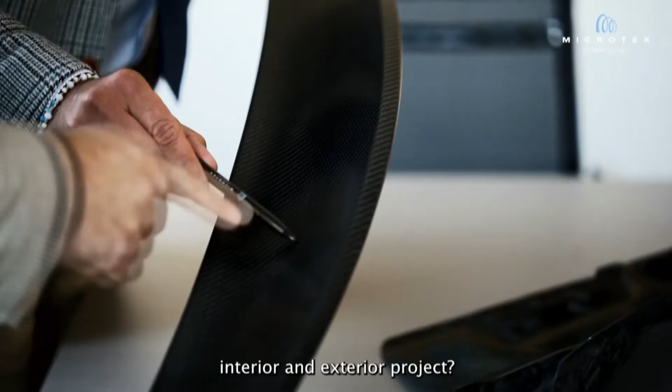And now a small presentation of our company. At Microtex Composites, we believe in our customer's ideas. I founded this company based on this belief together with my co-founders Gianfranco, Silvio and Federico. Do you have a customized interior and exterior project? A project in aesthetic structural composite material? Trust us. Our over 50-year experience in textile industries makes us experts in composite material, from dry fabric to prepreg.

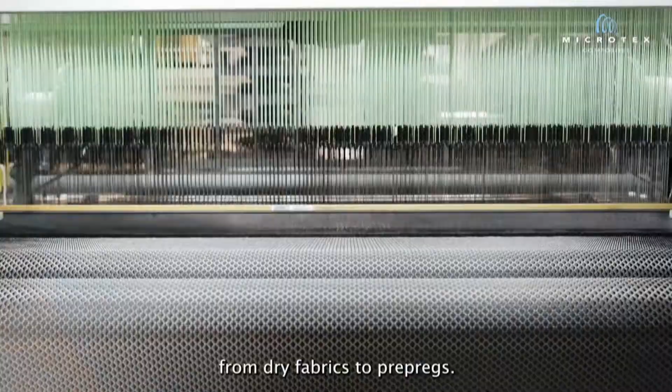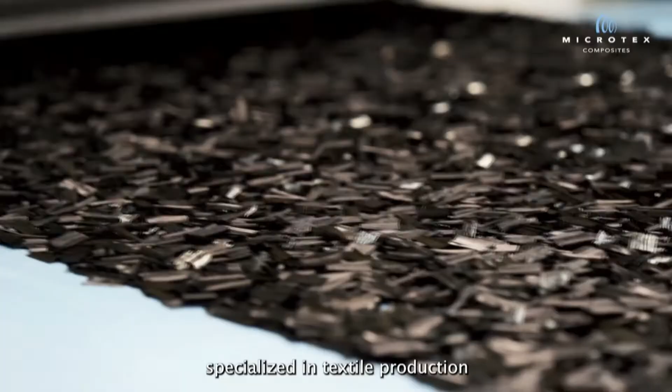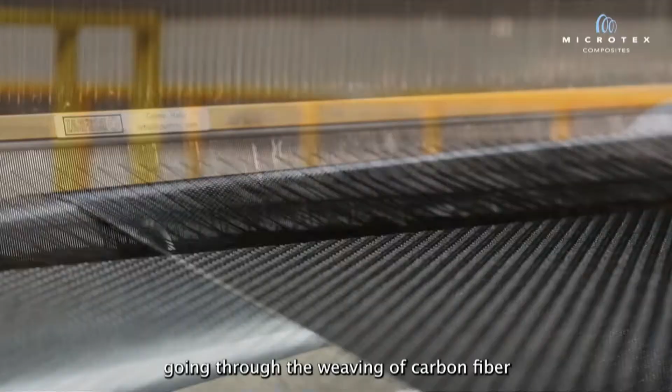Let's have a look at our history. Microtex Composites belongs to the historical Becagli group, specialized in textile production since the end of the Second World War. Nowadays we manage a fully integrated production chain, going through the weaving of carbon fiber, the development of our own resin systems, and the preparation of prepreg.

At this moment, we are looking around to expand our market overseas, especially in the US. Stay tuned.

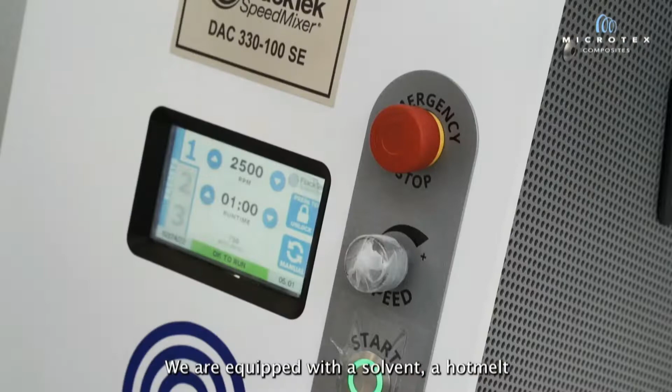This is the new operational headquarters located in Pistoia, close to the other headquarters in Prato. It is 8,000 square meters. We are equipped with a solvent, a hot melt, and a UD impregnation line, and a new SMC line, with more to come. The new headquarters features a new state-of-the-art refrigerator area, one of the largest in the market, capable of storing 180,000 square meters of prepreg.

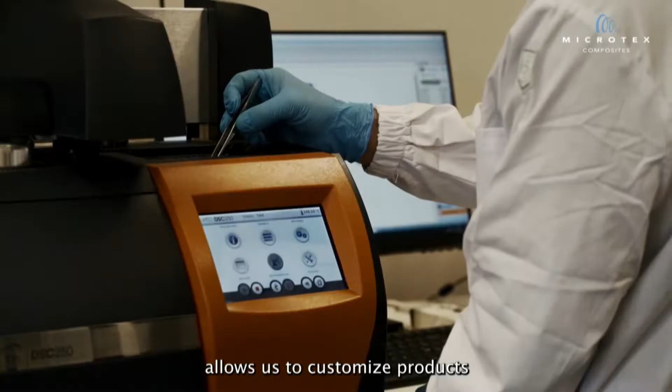We turn clients' vision into reality, beyond expectation. Our ongoing research for new inspiration allows us to customize products and match customer needs. Microtex Composites: your vision, our mission.

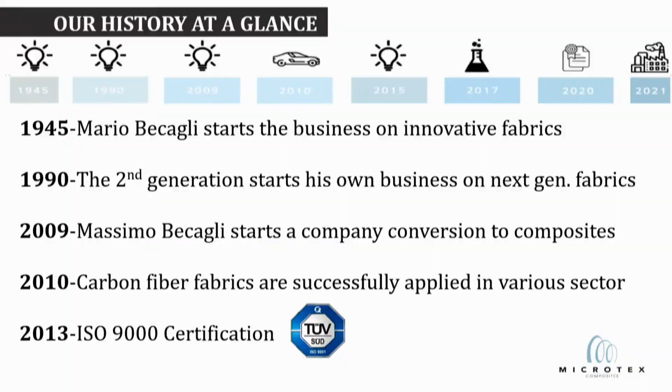So just to summarize a little bit the story behind the company: at the end of the Second World War, Mario Becagli was the first generation of the family, which started the business on innovative fabrics. And in 1990, the second generation started their own business, mainly on next generation fabrics and processes as well.

In 2009, Massimo Becagli started a company conversion into composites, so part of the company was converted into the composite market. In 2010, the carbon fabrics were successfully applied in different composite sectors. In 2013, we achieved the first ISO 9000 certification.

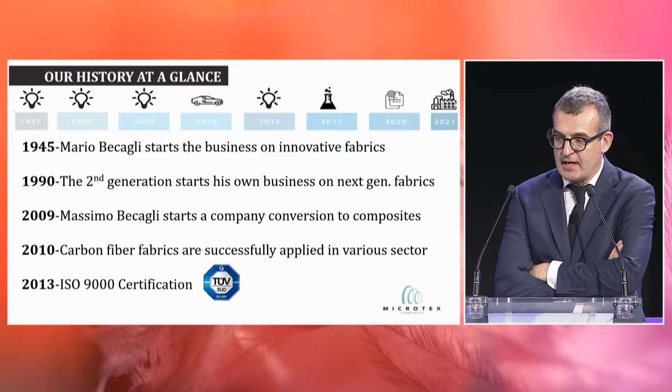In 2015, there was a spin-off of the mother company, so the birth of Microtex Composites, which was a spin-off of Microtex Cotton Club, which was oriented to fabrics for garments. In 2017, there was the implementation of an internal R&D lab, an improvement, and the building of a commercial network in the European, Middle East, and African area.

In 2020, the company reached the IATF 16949 certification, which is oriented more towards the automotive market, and the production capacity reached more than 2 million square meters per year. In 2021, there was the inauguration of the new 8,000 square meter plant in Pistoia, close to the original plant based in Prato. And in 2022, we reached an agreement with the Kordsa Group.

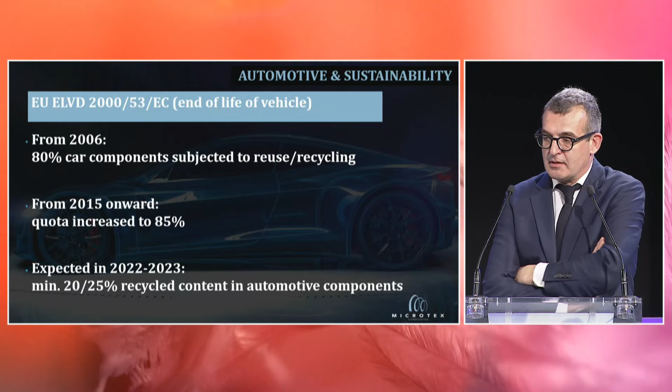This recycled content definition is still in discussion. There's some idea to consider recycled content as industrial scrap, production scrap, or end-of-life vehicle scrap. The use of composite in the automotive market is relatively young, so there isn't a big amount of recycled composite from end-of-life vehicles yet. This topic will probably become clearer in years to come.

At the same time, there's a vision in the same direction from the European Commission related to industry and sustainability, concerning packaging and packaging waste. This is an important part, because packaging is still not such a small part of our production.

For the moment, the minimum recycled target for packaging waste is fixed at 22.5%. There's a plastic tax for the European market on non-recycled material of 0.8 euro per kilo, which pushes producers and the supply chain toward recycled material.

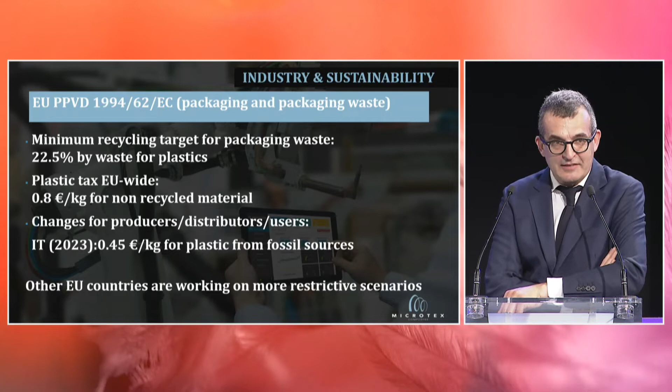In Italy, next year there will be an additional tax still to come, 0.45 euro per kilo for plastic from fossil sources. Other European countries are working on more restrictive scenarios, and we expect the situation to become much more restricted in the future.

As I said, the company approaches sustainability in all areas. Since the creation of the company, the original production site was fitted with a 1 megawatt photovoltaic power plant, helping reduce the carbon footprint of our internal processes. There's also a thermal oxidation plant for solvent oxidation, to recover energy from the oxidation of solvent and to reduce emissions below the local legislation level.

At the same time, on the new Pistoia site, we actually have a 0.2 megawatt photovoltaic power plant, and we are planning to increase the capacity in the future.

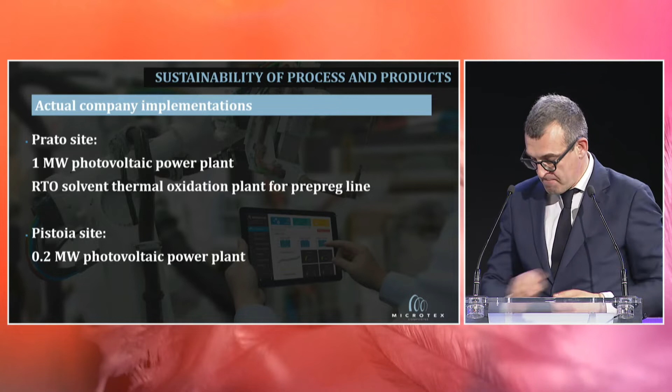So what is our philosophy here—introducing systems to reduce the carbon footprint during our processes is something all our customers are asking about. It's about understanding the impact of carbon footprint in our processes and in our products. This year we decided to have a dedicated department for this activity, starting with the aim to provide information to our end users in terms of CO2 footprint.

Our approach will be progressive. We start with a gate-to-gate approach, focusing mainly on the carbon footprint and energy dedicated to our internal processes—once material comes into the company for transformation, until it is transformed and ready to be delivered to the customer.

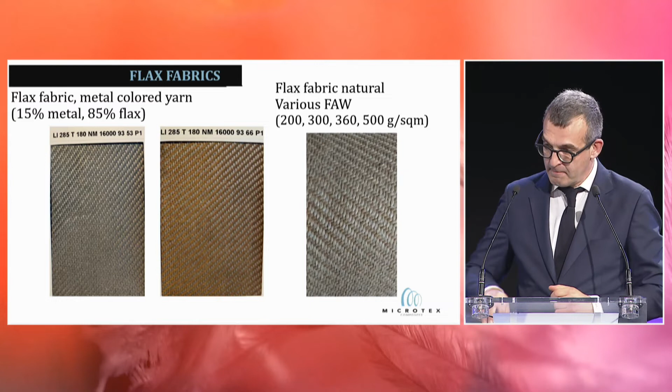We also produce a portfolio of recycled PET, which is combined with metallic yarn as well. These combinations are mostly used for car interiors.

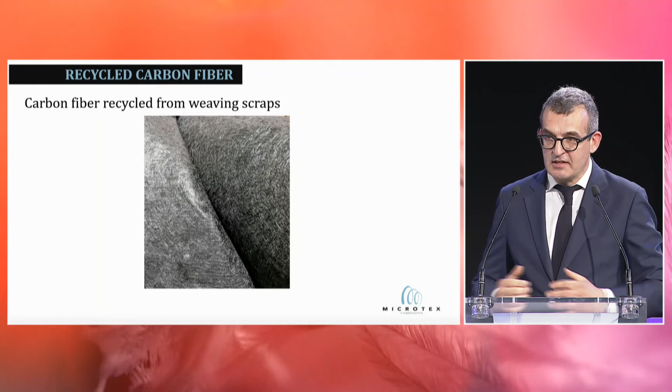Another important activity we developed over the years is carbon fiber recycling from weaving scrap. So basically we are talking about non-woven material, and this non-woven comes mainly from our industrial post-process material.

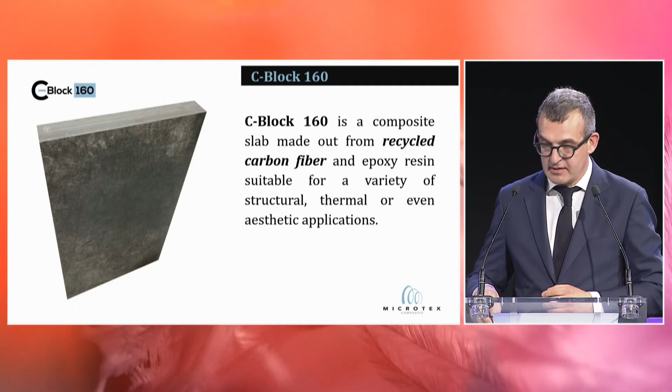Based on this experience, we started to produce some tooling blocks called C-Block 160. This is a block made from recycled carbon fiber and epoxy, and it can be used for different structural, thermal, or aesthetic applications. We produce this material from post-industrial scrap material.

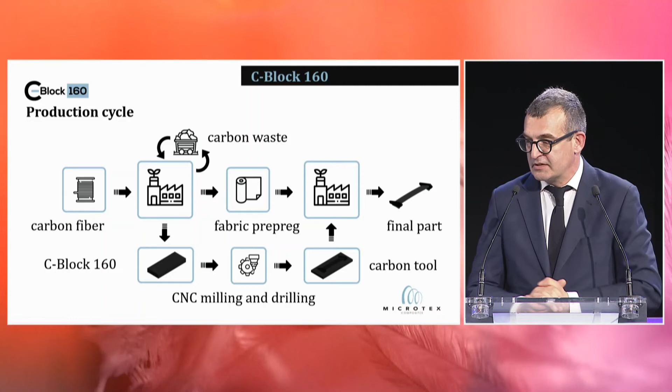In the second stage of production, the scrap that comes from our internal processes is transformed, and it becomes possible to produce this C-Block internally. The C-Block can be CNC milled, so it can be worked like many other materials on the market, to obtain, for instance, carbon tool.

Carbon tool traditionally requires a master model, low temperature master model, low temperature cure, and post-curing to obtain a carbon tool. But this process is very long, time-consuming, and the tooling material is very expensive.

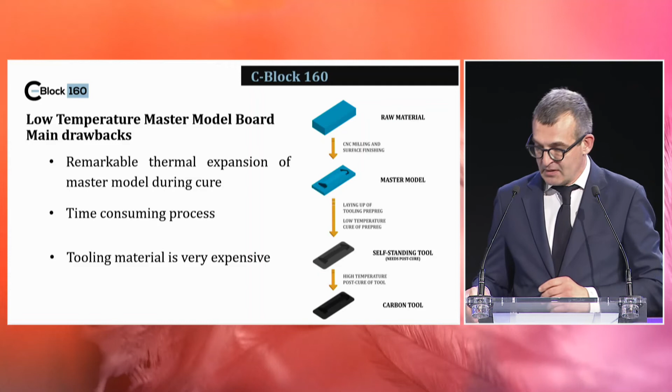There is also a remarkable thermal expansion, even in high-temperature tooling board, so there is a lot of work in the design of a tool in terms of minimizing or defining the offset and scale effects on the final dimension of the material.

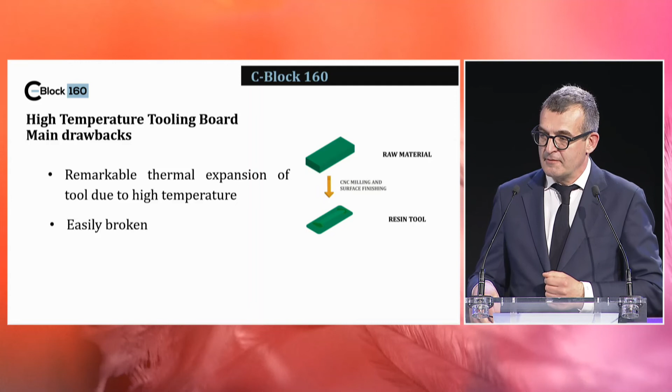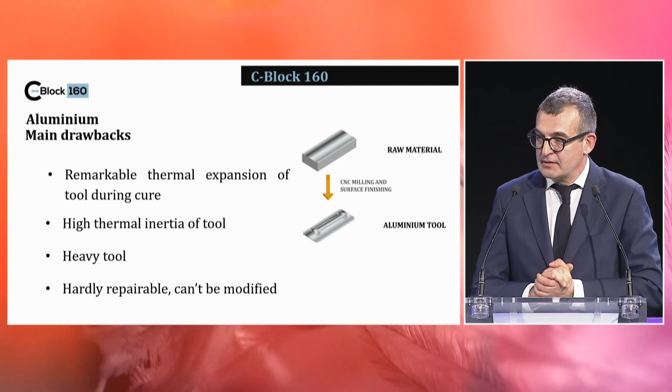High-temperature tooling boards are mechanically not satisfying, so they last for only a few shots. Aluminium molds have high thermal expansion, high thermal inertia, and are quite heavy and quite expensive as well, and quite hard to be fixed.

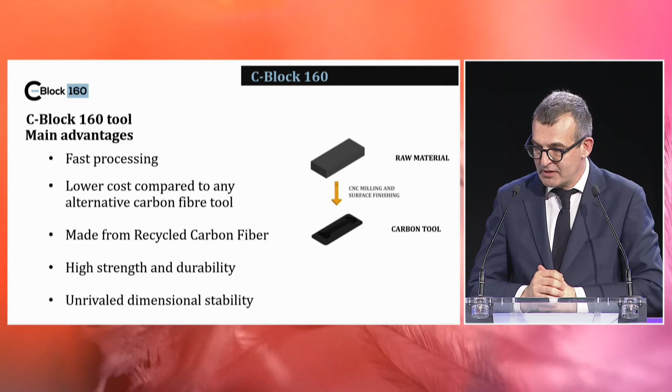With this material we can be very fast, we can process it very fast, and we have lower cost because we use recycled carbon fiber. We also have good durability and very good dimensional stability.

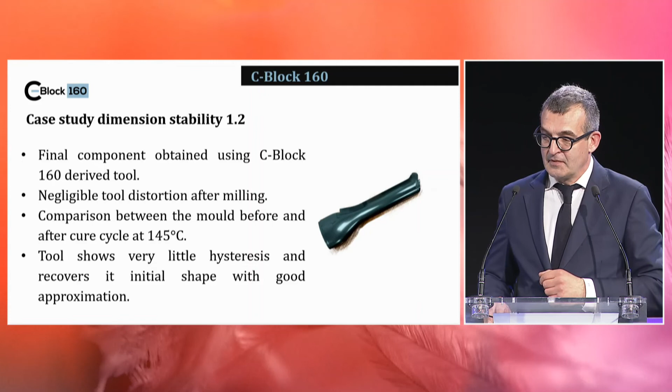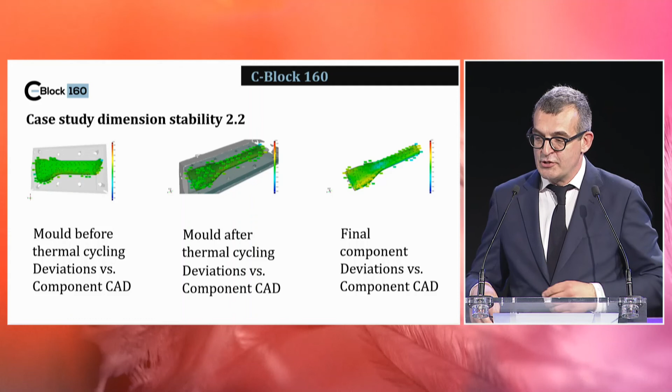This is an example of a finished component, showing a very small tool distortion after milling. This is a case study of the dimensional stability of the part, where we measure the deviation compared to the original shape and material.

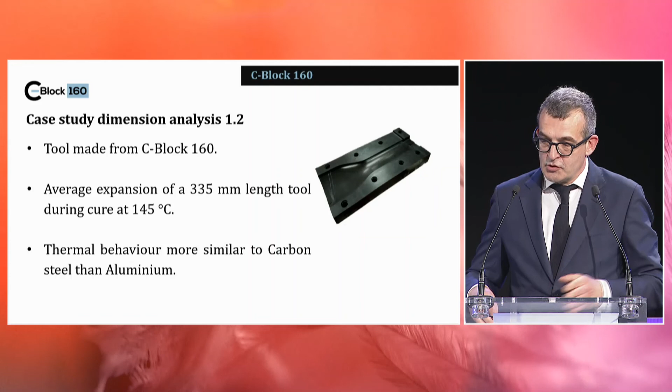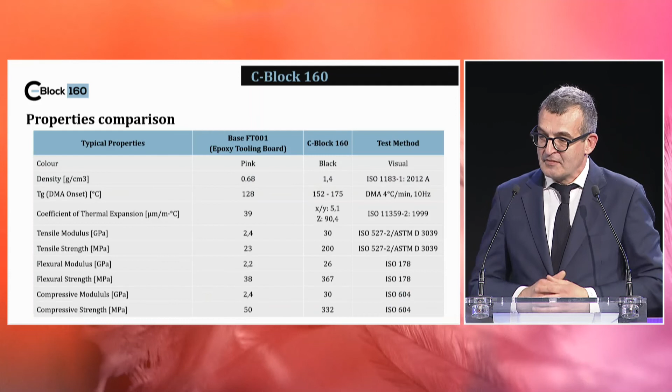We have a thermal behavior that is more similar to carbon steel than aluminum. Those are some values as a reference for the property comparison, and there are other applications for this block as well.

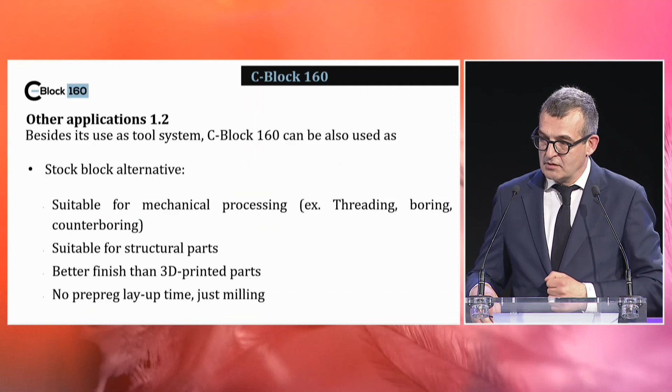It can serve as a stock block, an alternative to stock block, and there has also been some experience with pull-off testing.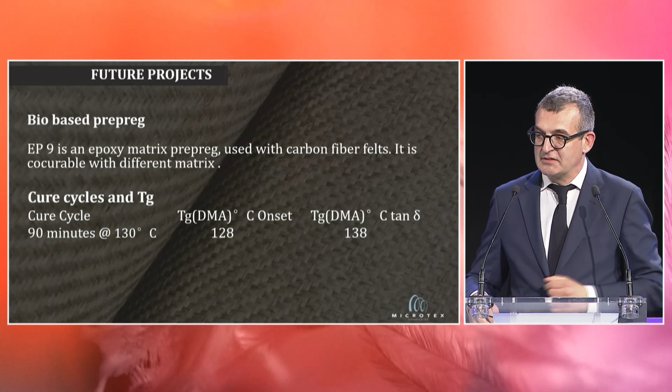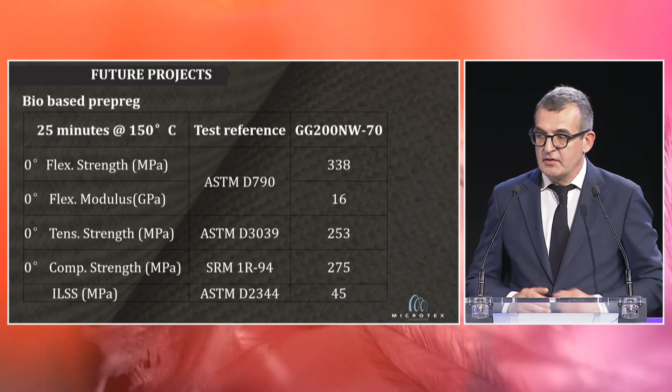Future projects are related to bio-based prepreg with long shelf life at room temperature, for the moment mainly for industrial applications. We have developed a bio-based prepreg with a reasonably high Tg for a bio-based material, and those are the mechanical performances combined with a recycled felt, a non-woven. For certain applications this can be a suitable solution, combining a bio-based matrix with recycled carbon fiber.